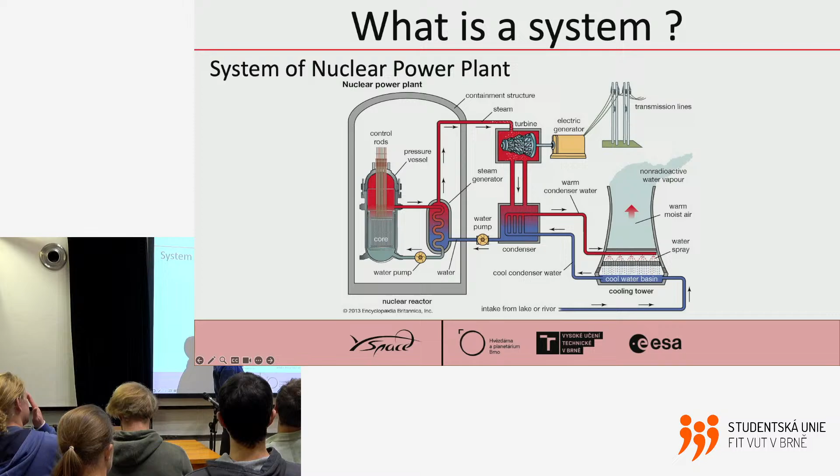But the system is not solely connected to space. On this slide you can see the actual system of a nuclear power plant. Nicely you can see the inner circle, which is one subsystem, the cooling part, which is another subsystem, and then the electricity generation, another subsystem. Another nice example could be even our human body. We are really composed of different subsystems, and together we are one human body system.

In reference to system engineering as a job or position, you can compare our general practitioner to the system engineer of our body, because he really needs to know the basics of everything. He studied medical school, he's a bit experienced in every field, but he's not the expert. His main goal is to find any problems with our body and then send us to a dedicated expert. So keep that in mind.

What is actually the mission or the goal of the system engineer? System engineering is a multidisciplinary field, as in this general practitioner example. In technology, you usually have to have a bit of knowledge from each technology field. For example, if you want to be a space system engineer, you have to have a basic understanding of everything about space. But what is really important, you are not deep dived into one selected subsystem. You just have a general overview of everything, not dedicated to one thing.

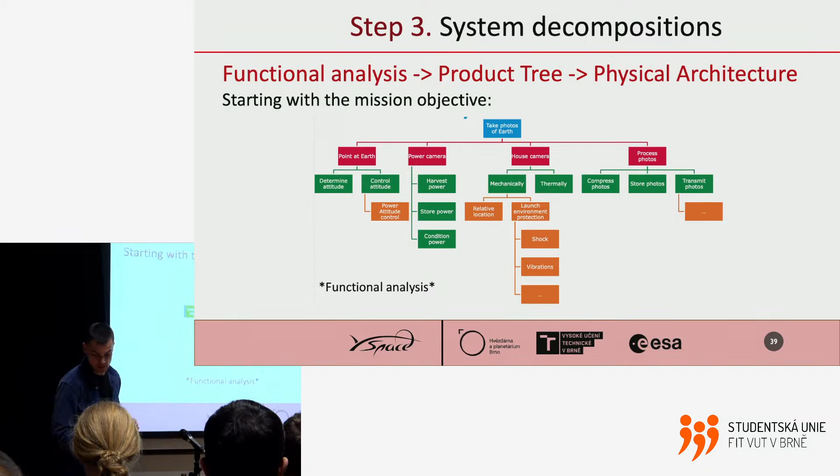So you are elaborating further, again for housing, again for the processing of the photos, because you want to deliver your client not the spacecraft in space, but the client wanted the photos. So you just simply go step by step, define the functions of your system, and this is really handy even during the requirements definition, because you can easily derive the requirements from these functions. On this slide you can see such an example, in our case for mission Kostka. So basically you are just going down through the systems.

When you are kind of done with this functional and requirements definition, you can start to build your system, your satellite, by blocks. And this is a really important step, because from now we're going to introduce subsystems. And our strategy in the YSpace team is to really have different departments related to subsystems. So that's the idea behind this division. You will find out that, okay, you need the payload, which is the camera. You need the attitude control system, which is the tilting of the spacecraft in space. It's attitude, not altitude. You need power system, structures and so on.

And from that moment, you can differentiate between each engineering branch, and then you can assign specific engineers for each task. You don't need to deal with a horizon sensor or GPS as a system engineer, but you need to dedicate that area to people with such expertise. So as I mentioned, in the YSpace team, we have separate divisions. The following workshops will be mostly dedicated to specific divisions. For example, the next one will be dedicated to the electrical system, but for now we're going to go briefly through the general division in usual space projects, starting from the payload team.

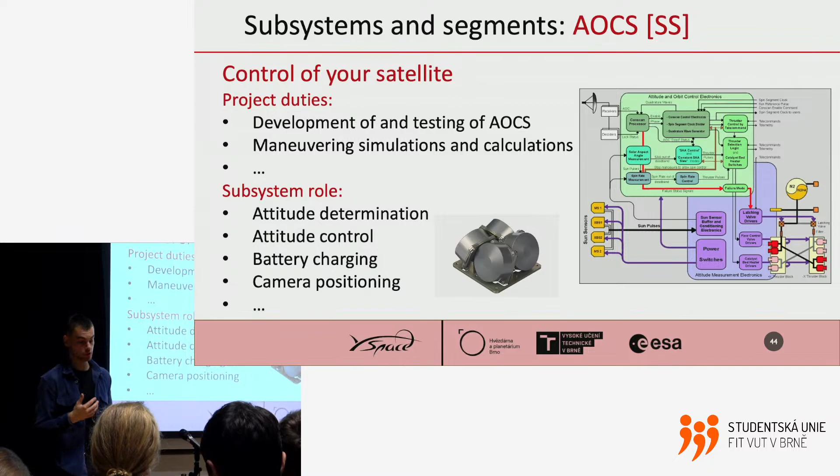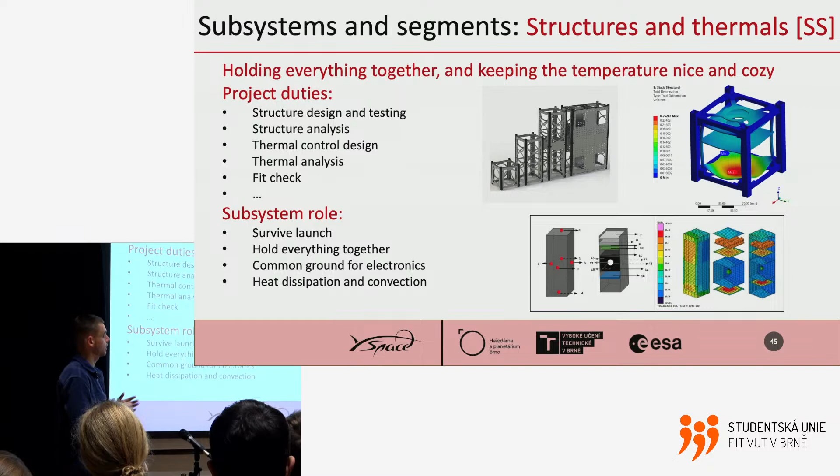And the last space segment subsystem is the communication system. It's really the one and only connection to your satellite from the ground, so it's super important. The subsystem role is pretty obvious, to transmit and receive data. Actually, you can use such a subsystem in a deep space mission for positioning your spacecraft. You can range the distance to your spacecraft.

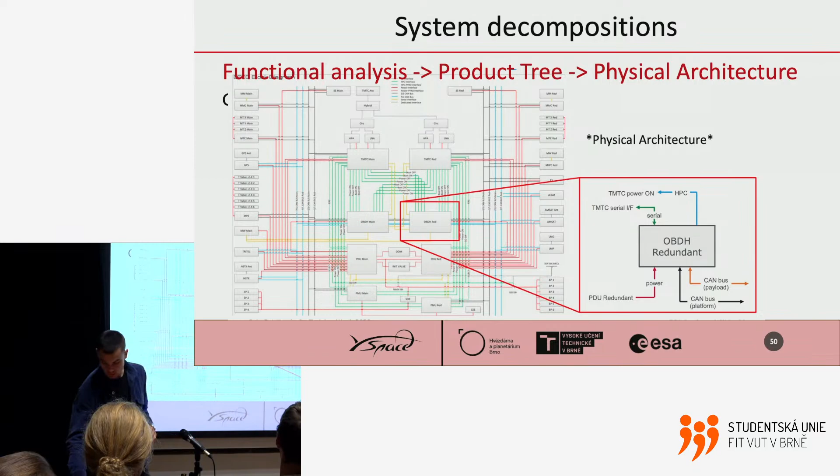On this slide you can see such a physical architecture in our case, on the mission Kostka. In comparison, you can see that during project development the physical architecture becomes more and more similar to the actual physical implementation of the satellite. You can see the solar panels, the PCB boards with different connections, and so on.

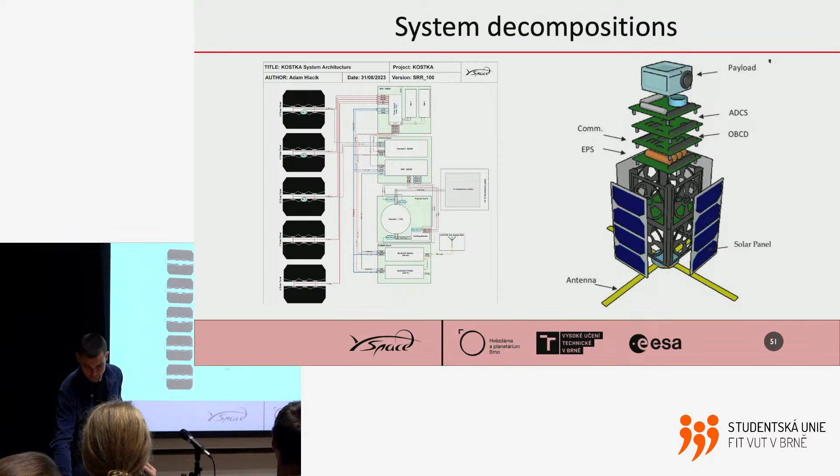And the last step when you're following the V diagram, so we are almost at the bottom, and really important for system engineers, is analysis. There are a number of different analyses you need to or may perform, from thermal to mechanical, electronic or illumination, and when you have some kind of science payload, you may even need to simulate that.

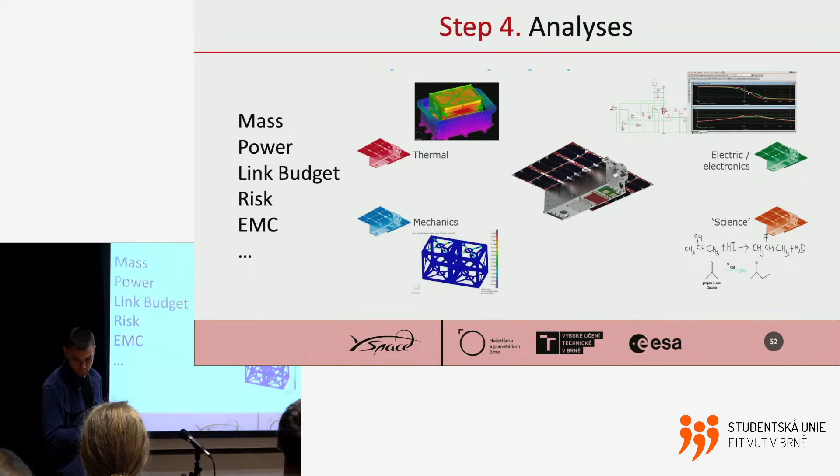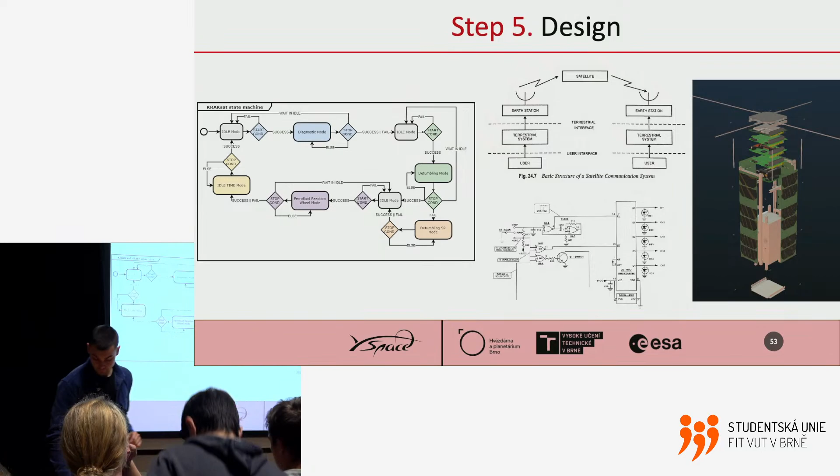So when you are satisfied with your design and you analyze your design, you can really go deep into detailed design. So you're implementing everything together, creating the state machine of your satellite, for example, drawing the electronic circuits, defining the communication strategies, or creating the CAD model of your product. And in this phase, you are really at the bottom of the V. So you came across all of this, and you are at the bottom. Now you need to manufacture things.

Actually, the NOAA-19 satellite really just fell from the pallet, and it was really just a human error. And you can see human error can cause damage of tens of millions of US dollars. And actually, the reason for this was that when the shifts in the assembly factory were changing, the first shift forgot to put in a special pin securing the satellite on the pallet. And the next morning, when the next shift came, they just, as usual, moved the pallet, but the whole satellite just fell on the ground, and yeah, they kind of screwed it.

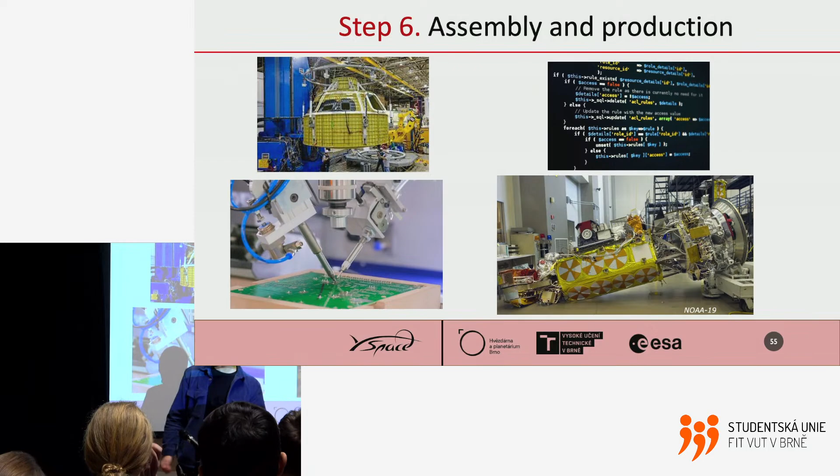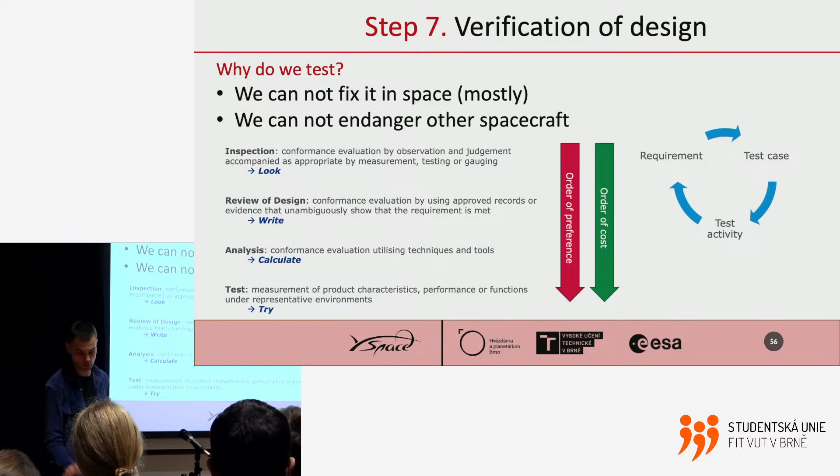Maybe the last slide. So what's the difference between qualification and acceptance? It's kind of important, because when you want to launch your satellite, firstly, there is no way to fix it in space once you've launched it. Okay, there were some cases, but it's not usually possible. And the second thing, you cannot harm the other satellites in the rocket. Usually you're launching your satellite with a couple of different satellites, and you don't want to harm them with your satellite. So the qualification is really important.

Qualification is a process where your product, which could be a subsystem or a whole satellite, undergoes, for example, temperatures that are not usually common in space. So your product witnesses higher loads than it will witness during its operational life. And the aim is to really make sure that your satellite or your component will be working in space. And when your product is qualified, you cannot really use it on a spacecraft again. You need to build a copy of it, and such a copy needs to be accepted.

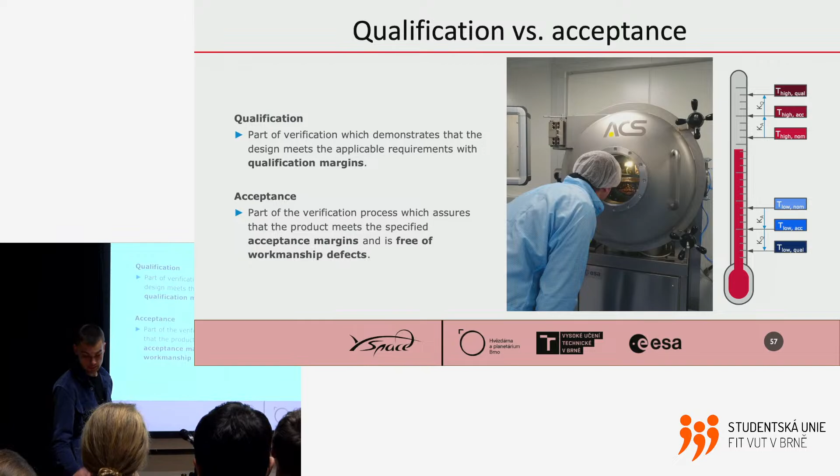And when you are ready, you can finally launch it. And after launch, there is operations, but before the operation itself, there is a beer break.

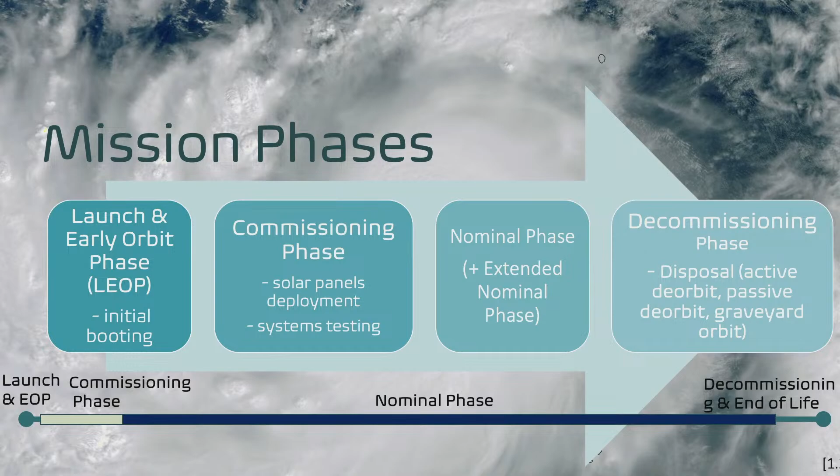As I said, the operational phase starts with the launch and early orbit phase. That's when the satellite is deployed in orbit, all the subsystems are booted, and you can also deploy the solar panels and these things. Then you go to the commissioning phase. That's when you calibrate your payload, you diagnose the subsystems, and check if everything is ready for nominal operations.

Then there is the nominal phase. That's when you play with the toy. That's when you operate the satellite, when you perform the activities with the payload. So it depends on the objective of your mission.

If you are taking pictures of the Earth, then you are taking pictures of the Earth and these things. And then you continue with the decommissioning phase. That's when you end the mission and you deorbit the satellite, or you can move it to graveyard orbit. It depends on your mission.

If you are on geostationary orbit, which is located 35,000 kilometers away from Earth, then you move it to graveyard orbit. If you are located on LEO, which is low Earth orbit, from 160 kilometers to 2,000 kilometers, then you have to deorbit the satellite. It means mainly that you just lower its velocity and you just let it burn in the atmosphere, mostly.